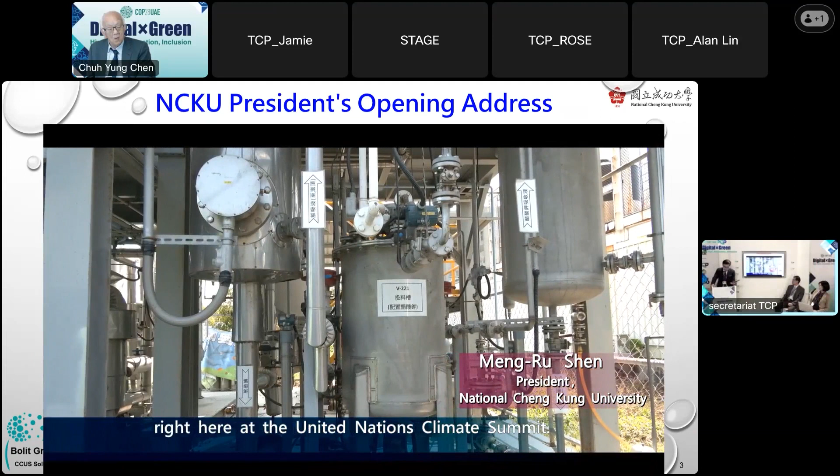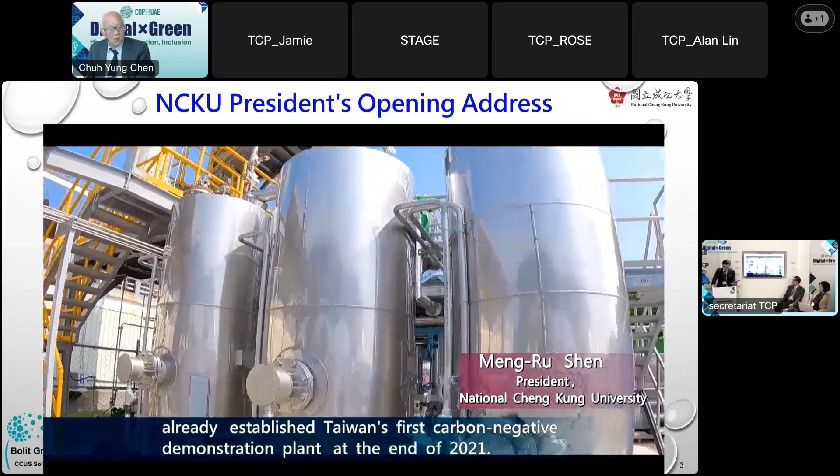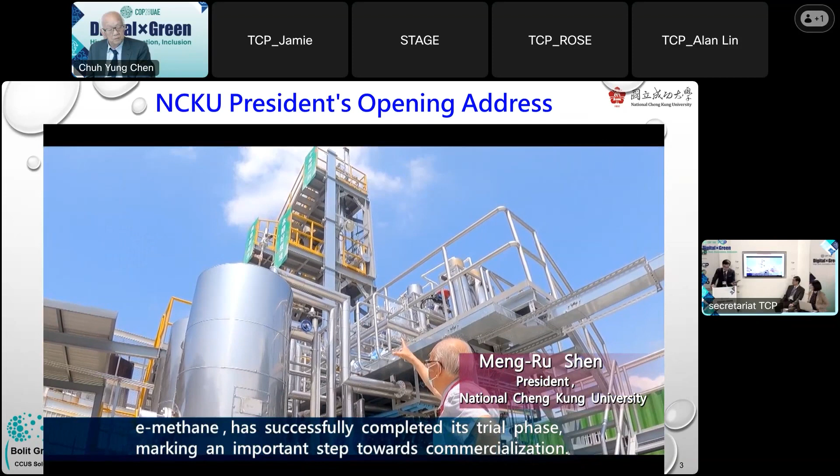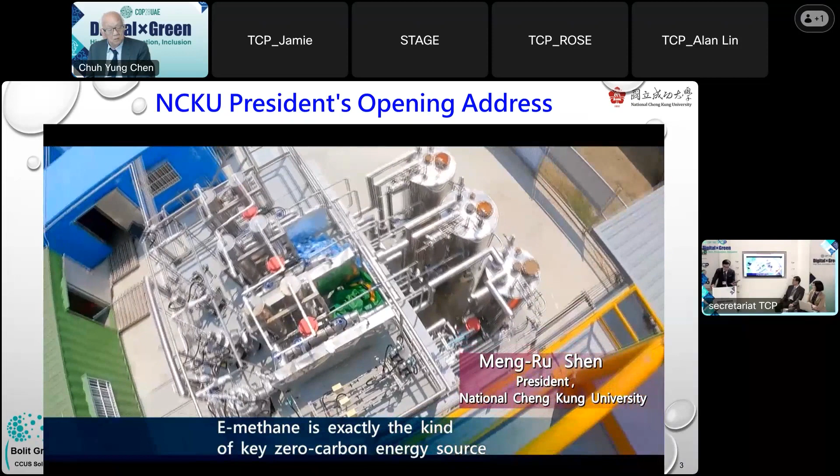A key concern of this COP28 is a global collective effort to achieve carbon reduction, particularly in the transition to zero carbon energy and the replacement of fossil fuel. We are proud to announce that Professor Chen's team already established Taiwan's first carbon negative demonstration plant at the end of 2021. This groundbreaking technology of artificially synthesized green natural gas, e-methane, has successfully completed its trial phase, marking an important step toward commercialization. E-methane is exactly the kind of key zero carbon energy source for the 2050 green energy strategy of Europe, Japan, and other countries. We feel honored to present our scientific work at the stage of the United Nations

and to contribute globally in combating climate change. Finally, I would like to extend my gratitude to all the distinguished participants who honor us with your presence. I hope this forum will not only showcase Taiwan's new achievement in CCUS technology and foster future international collaboration, but also inspire young people to engage in this crucial campaign against climate change. Facing the urgent climate crisis, we need the strength of the younger generation more than ever. Taiwan will go on with you.

Thank you very much. Yeah, thank you, President Shen. And I think he is the first university president from Taiwan in COP28. I think it's very wonderful, and the video is very good.

And besides that, we have two speakers here in the COP28 Blue Zone. The first one is Professor Wang Zhengjie. Professor Wang, say hello to everyone. He is Dean of the Engineering College of the Southern Taiwan University of Science and Technology, and a professor of the Department of Chemical and Material Engineering. And actually, you are a team leader under Dr. Chen, right? Chuh Yung Chen. And besides that, we also have Doris Dennis.

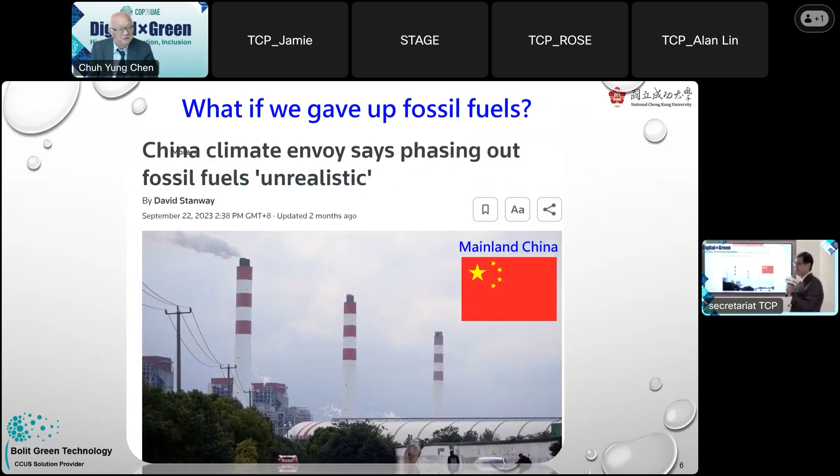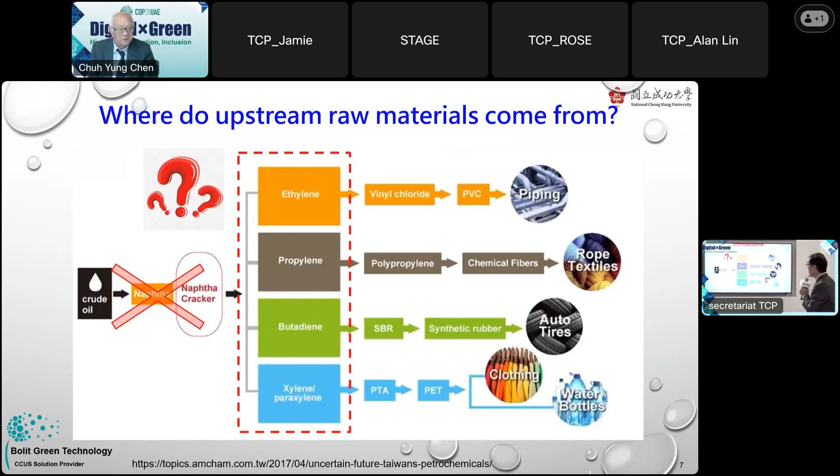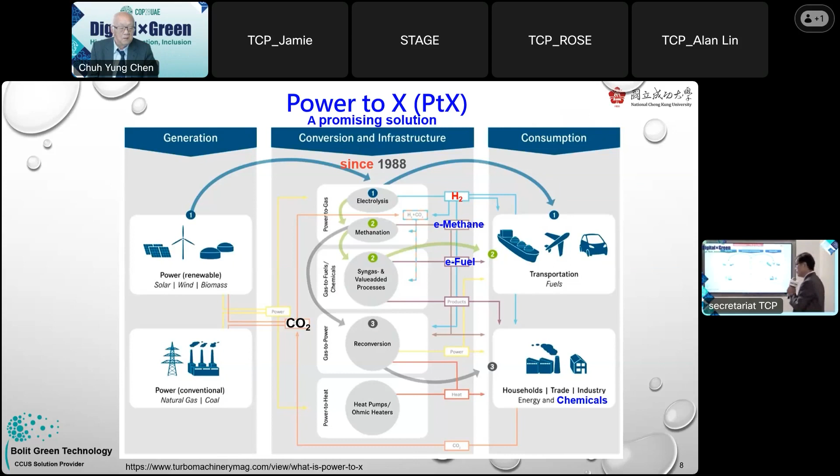So if we do not use crude oil, we must think: where does the upstream raw material come from? Is carbon dioxide possible? Yes, it is possible. It's a promising solution. Since 1988, scientists have developed technology to convert carbon dioxide into e-methane, e-fuel, and green chemistry. We call this technology power-to-gas or power-to-X, where X is everything, including hydrogen, e-methane, or e-fuel.

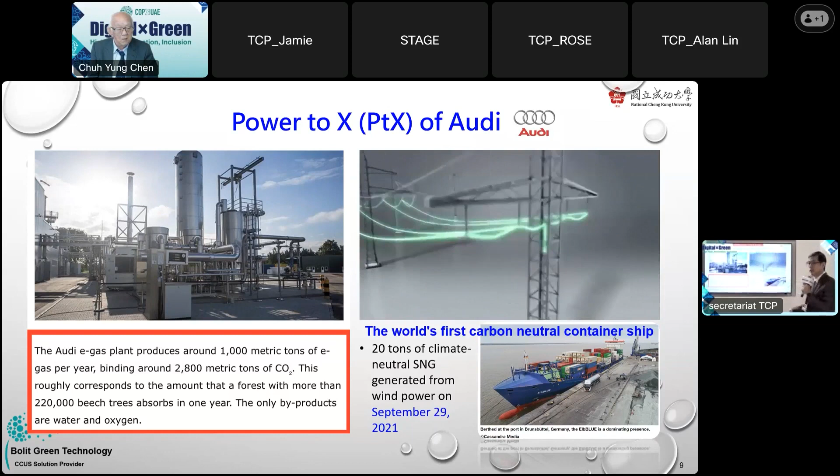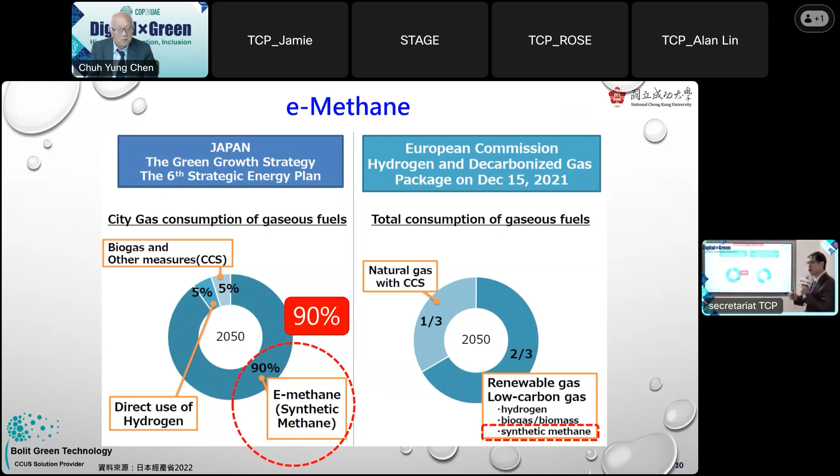For example, the Audi car company has built e-gas production in Germany, capturing around 2,800 metric tons of carbon dioxide. And their e-gas supported the world's first carbon-neutral container ship, which sailed successfully this year. So this is a very popular issue in the world, such as in Asia, Japan. Japanese companies plan for e-methane to make up about 90% of city gas consumption by 2050. The European Commission also plans to manufacture e-methane by 2050. So this is a big future now.

And we must face some challenges for power-to-gas or power-to-X. The first is a high-performance catalyst, because if we can react at a low temperature, energy consumption and cost will decrease. The second is hydrogen from green power. Green power is not enough now, so if you want to use hydrogen, you must search for other sources. Maybe biogas from dry methane reforming is one method. The final problem is we also need excellent engineering to design a high-efficiency process. Maybe some advances should be developed in the future.

Thanks. Yeah, thank you, Professor. Actually, lots of audience members came here because if we want to phase out fossil fuels, you know, our clothes, everything depends on them. We are from Taiwan, and the ICT industry organized together to be a TCP.

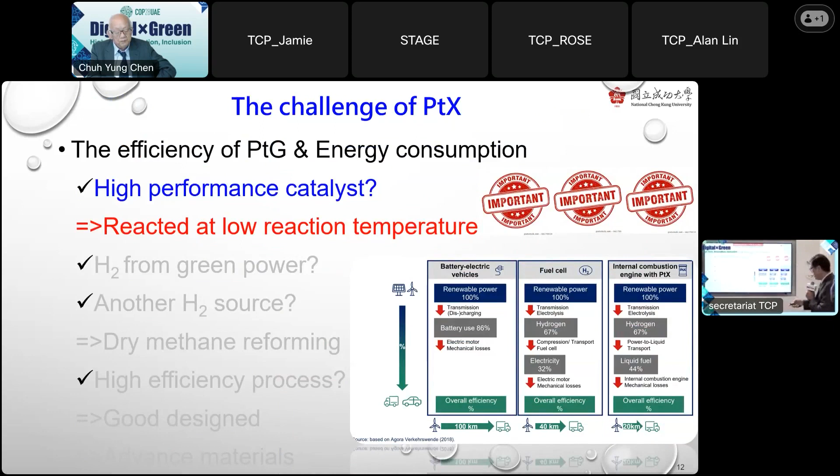You can take a short time to process the chemical. Taking a short time means energy saving, and the cost will be decreased. And now, NCKU research team has developed some cutting-edge catalysts. This is very important in the chemical industry.

It can convert carbon dioxide into e-methane, ethane, and propane. We know C1 to C3 can be applied as e-fuel, just like natural gas. And if we convert it into ethylene and propylene, we know it's a raw material in the chemical industry. So we can use this raw material to manufacture some green chemicals.

This research team also developed a nanotube solvent to capture carbon dioxide from the flue gas. More interesting, this cutting-edge catalyst can convert bio-waste into hydrogen or other chemicals. With this cutting-edge catalyst, we know the bio-waste is digested and we can obtain biogas. The biogas contains methane and carbon dioxide.

If we use our catalyst, it will convert to obtain carbon monoxide and hydrogen. We know these two gases are synthesis gas in the chemical industry. This is very popular now.

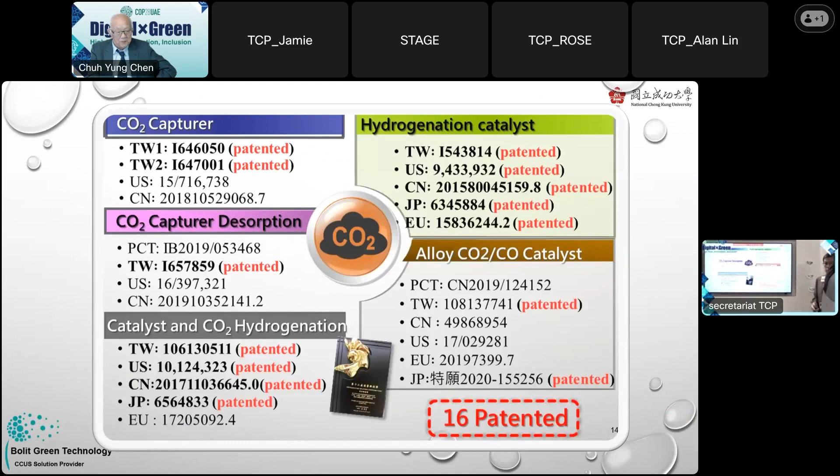I introduced some cutting edge catalysts and processes. We can see it can operate at low temperature and low pressure. In general, methane manufacturing must approach 300 Celsius degrees, but with this catalyst we can operate lower than 180 Celsius degrees. Second, we can convert 100% within a short period of time because of this catalyst. Third, we can produce high value ethane and propylene, maybe over 20%. This is more important because it's like shale gas.

I'm one of the professors, from the previous page. I think the key issue is the temperature, right? Yes, yes, and the other special point is ethane and propylene.

Okay, next the PPT will show you what is important, because we can see the shale gas in the USA has ethane content no more than 20%. If we use our cutting-edge catalyst, we can convert carbon dioxide into high content ethane and propylene, over 20% as I said. More important, shale gas in the USA has many impurities such as sulfur, but if we use carbon dioxide, our product is very pure with no sulfur. This means we will decrease PM2.5 particles, because sulfur is also a source of acid rain.

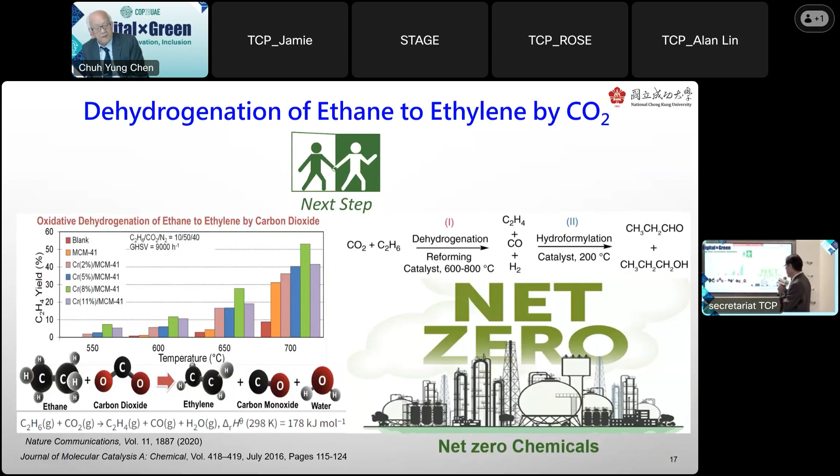Maybe next we can search for some industrial company which has a technique to convert ethane with carbon dioxide into ethylene and propylene. Ethylene and propylene are raw materials of the chemical industry. They can manufacture many chemicals. So if this process moves forward, we can approach net zero chemicals.

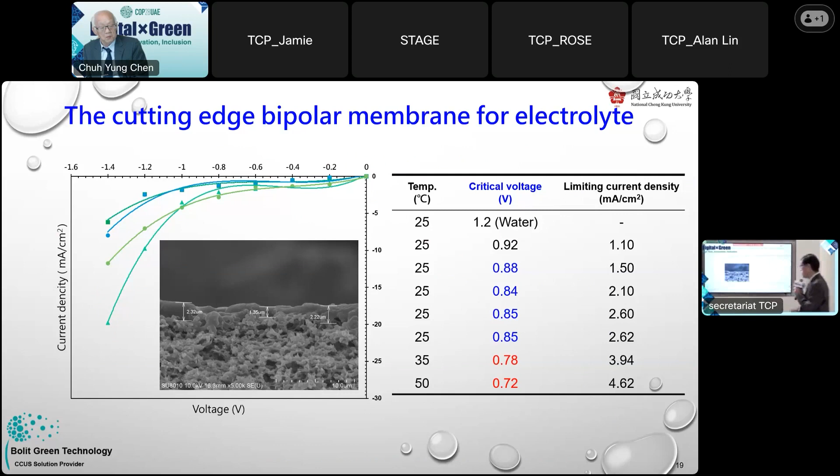However, our research team employs plasma energy to induce radicals on the surface of the membrane. Then polymerization happens at the interface, so we can manufacture a very thin membrane. When we performed water electrolysis, we saw the critical voltage drop to 0.8. When we operate at slightly higher temperature, the critical voltage decreases further to 0.7. So this is a very good bipolar membrane.

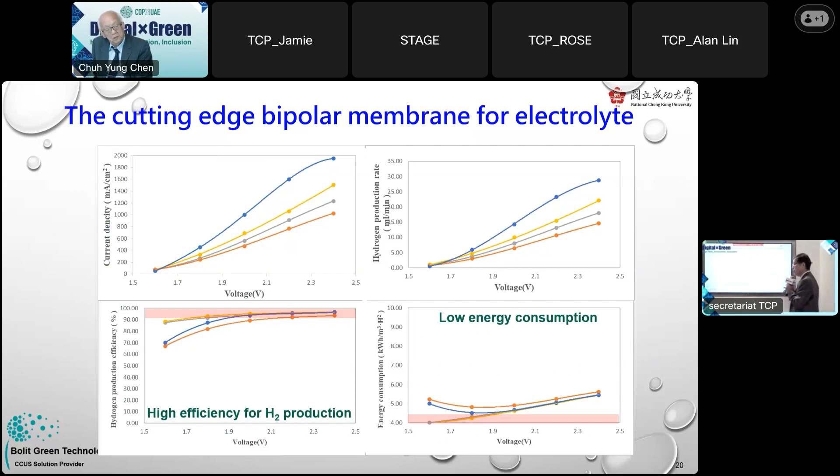Their hydrogen production is highly efficient, and its energy consumption is very low. It's valuable for commercialization. So I think this bipolar membrane is the best choice for water electrolysis from green energy. Thank you.

Yeah, thank you Professor Chen, and a very wonderful talk. I'm not a chemical engineer, but I understand what you say. It's not easy to explain from knowledge so that common people can understand.

Right now I will give the floor to Dr. Chen, because from the science or technical side it's wonderful. But from the business point of view, since they need business support, I'm wondering if there's any kind of business model, or is it just scientific research? Because in the long term the ecosystem needs a business model to survive, and sustainability is very important. Is there any connection with carbon credit in the future, please? Okay, thanks Dr. Peng, and thanks Professor Chen.

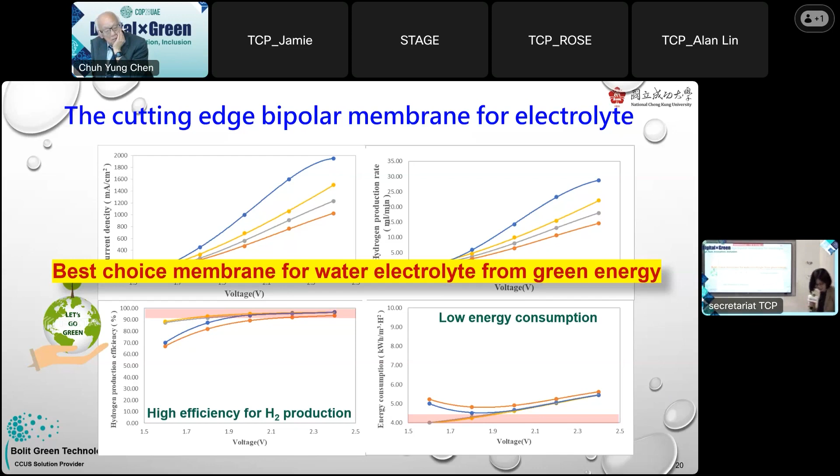So next, okay, the technical part has been covered. So what I'm going to explain or share with you is more the business part. As Professor Wang already mentioned, our technology can produce decarbonized gas energy.

What is important is that we capture the CO2 from the chimney of industry that would normally be released to the atmosphere as a greenhouse gas. What we do is capture the carbon dioxide from the chimney, then use it as a raw material to produce synthetic natural gas, which is methane. This means all the emissions can be captured and then used as material to make natural gas, to replace raw material again in industry or for households in the future.

So our business model is to decarbonize gas energy. Let me give you a quick picture here. We capture carbon from flue gas, which is hard to abate, from different sectors, for example steel mill, aluminum, and fertilizer.

We capture all the CO2, then combine it with hydrogen generated from green sources, from renewable energy or turquoise hydrogen from biogas. We have different patents for biogas absorption and for the reactions between CO2 and hydrogen. So we capture the CO2 and combine it with green hydrogen to produce e-methane, e-ethane, or e-propane, which are very important.

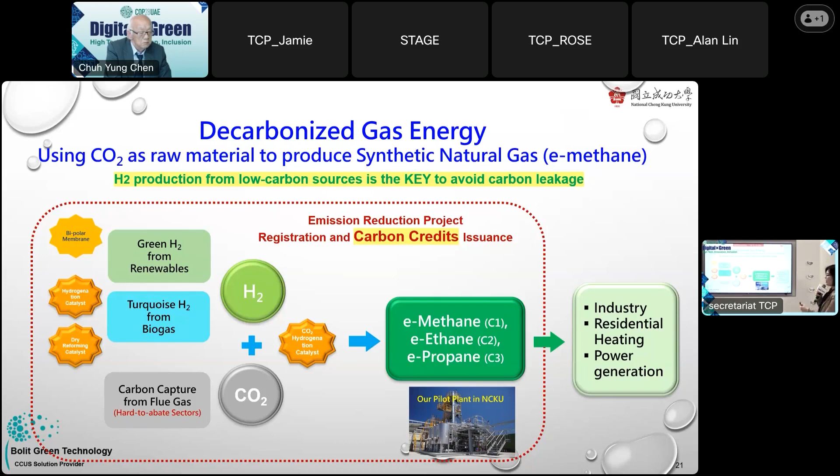So comparing this, if we want to ship hydrogen everywhere, our recommendation is to ship CO2 to where green hydrogen can be produced, which is much easier and more economic. So at this stage, the CO2 is captured, and to optimize the CCUS value chain on a global basis, we ship CO2 to where green hydrogen can be produced, to realize the reaction between CO2 and hydrogen to produce methane.

So step one, we capture the CO2 and liquefy it. Then we transport the CO2 to where the green hydrogen is. This capture of CO2 from industrial flue gases and shipping for CCUS or CCS is really an additional solution contributing to greenhouse gas reductions. Of course, we would like all the shipping carriers to produce less greenhouse gas as well.

So what's happening is there's a new trend, a rapid growth, where many gas companies in the world, because they want to first phase out fossil fuels - meaning natural gas dug from the ground will be phased out soon or in the future - so these gas companies, not having natural gas from the ground, try to get it from industry instead. It's really like a circular economy in the future.

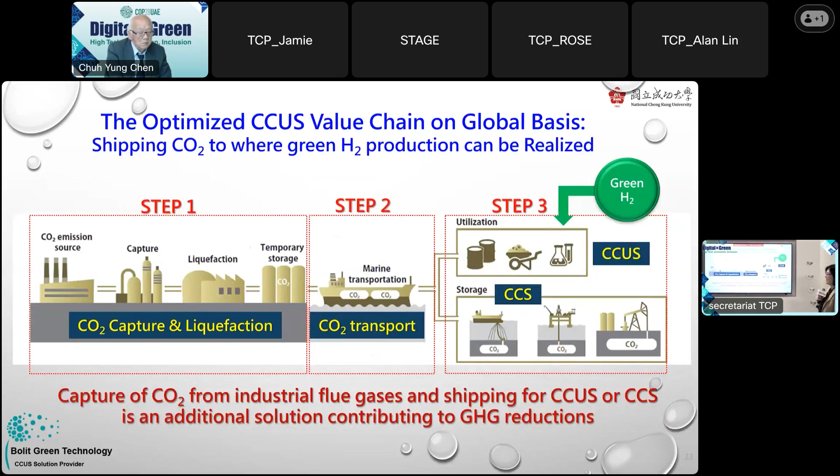You know why the Hydrogen Shot cost can be reduced? Because there are more and more renewable energies. The price of renewable energy is coming down. That's why we can produce green hydrogen from less expensive sources. That's very important. I think it looks like there's some business model right now, right? We do have some business model, but we're showing the end. Yeah.

Wonderful. So I will go back to some technical issues, because you mentioned we will talk about biogas reutilization and also green syngas. What is syngas? Because your model is CO2 resource reutilization into e-methane, right? Methane and e-propane. This kind of thing we can call a circular economy, with the potential to create new industrial chains and economic models. So it changed our thinking about CO2.

I noticed that Japan, at the Osaka World Expo, will use new technology as a showcase, turning kitchen waste into synthetic natural gas, e-methane, and another future trend of waste resource reutilization. So Ding Wang, can you talk about more applications of biogas and any technology breakthroughs needed? Okay, thank you, Professor Peng.

For biogas, we just mentioned hydrogen may have two sources. One is obtained from water with electricity from green power. The other resource may come from bio waste. Because when the bio waste is digested, we can obtain synthetic gas. As I said before, synthetic gas is very popular in the chemical industry. This is a very well-known technology.

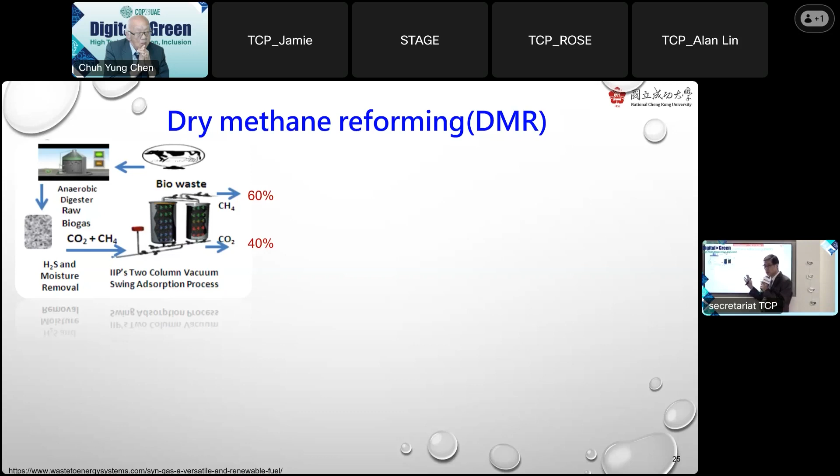If we consider the biogas composition, we will find the methane is approaching 60% and the carbon dioxide is 40%. So if we obtain this biogas, we can use our cutting-edge catalyst to transfer them into synthetic gas. And I must mention the carbon dioxide in biogas is not enough, so you must add some carbon dioxide from the capture system, so more carbon dioxide will be used in this system.

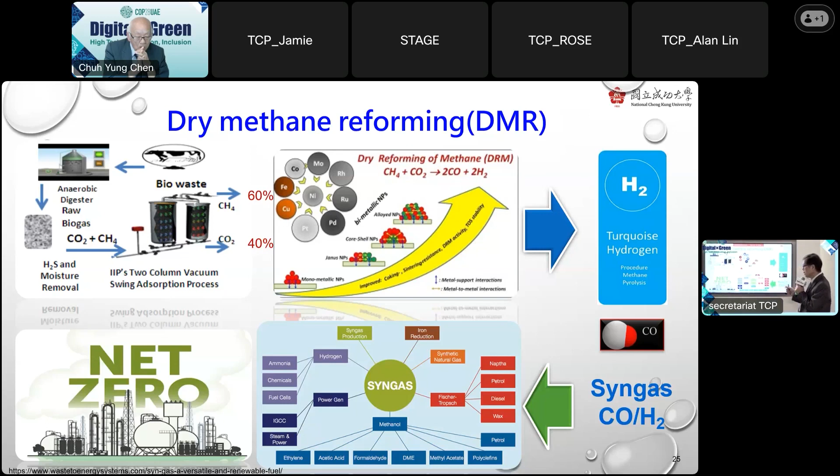And for the synthetic gas, I show you this PPT below. You will see that with synthetic gas you can manufacture methanol, formaldehyde, or polyolefin, such chemical products. So this is a very valuable process, so we can approach net zero chemicals.

But if we use DRM technology, dry methane reforming of biogas, we must face some challenges. One is methane activation. Challenge two is thermodynamics and kinetics. The third challenge is catalyst development. The more important challenge is coking, because if coking happens, your catalyst will lose its function, so the process will be useless. However, when we use our cutting-edge catalyst, coking will not happen.

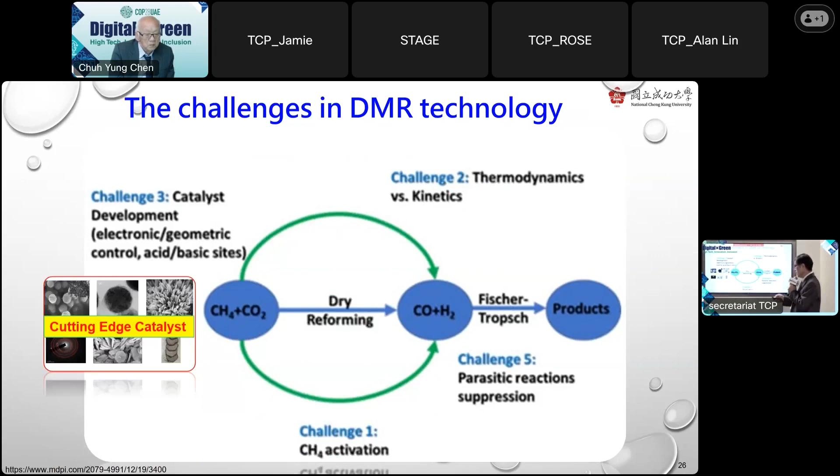More important, when we take this catalyst after 100 hours of operation, we can see in this picture there is no coke formed. This is important. Many catalysts form coke in a short time. So I think maybe this is a high potential catalyst for the net zero DRM process in the future. Thank you.

Okay, thank you, Ding Wang, you made a wonderful introduction about the reutilization into e-methane. I didn't know CO2 had so many functions. Actually, it's a very good idea. So I have a question about CCS, because CCS, as we mentioned, is a carbon capture technology. And another issue is fundraising.

So I will talk about this topic because Taiwan will need about 40 million tons of CCUS by 2050. Actually, it's a government proposal. However, CCUS means capturing CO2. Ding Wang, can you introduce the CCS of your demonstration plant, the NCKU plant? And is there any kind of technological breakthrough in this one?

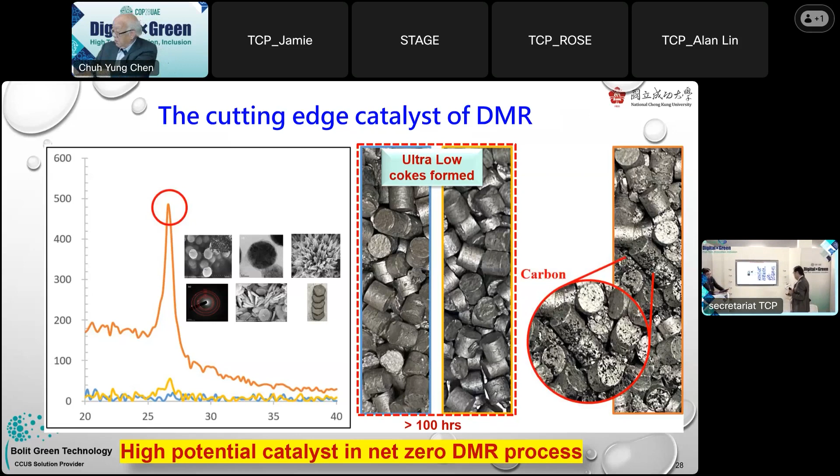And I will ask Dr. Chen. Actually, you mentioned you have some business model there. However, as I know, besides the business model, you should have some fundraising. For example, Japan has the JCM credit model. They encourage enterprises to join. So do you have any idea about the fundraising and the ecosystem, how to make it, please? Yeah, Ding Wang first. Okay, you first. Okay, thank you, Professor Peng.

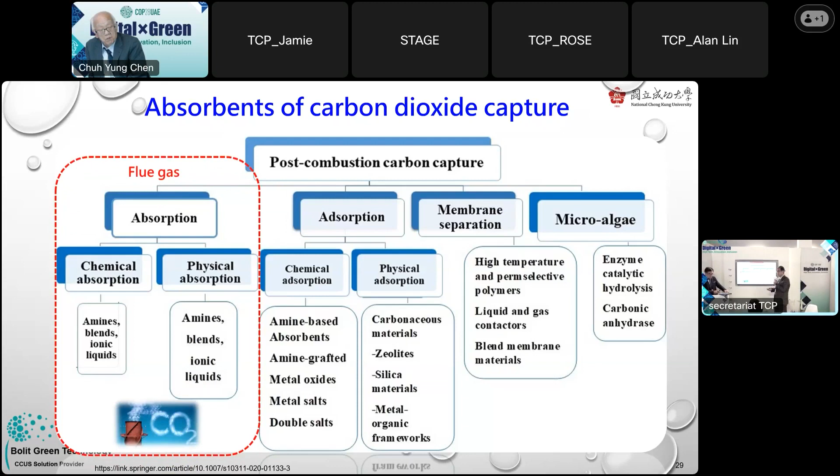The NCKU research team developed a very interesting absorbent for carbon dioxide capture. If we want to take this process, capturing carbon dioxide is the first step. It's very important to reduce carbon dioxide emission. We know many methods can capture carbon dioxide. However, to capture flue gas, absorption may be more suitable because the amount of flue gas is very large. Typically, monoethanolamine is an alkaline liquid. It can react with the acid gas carbon dioxide.

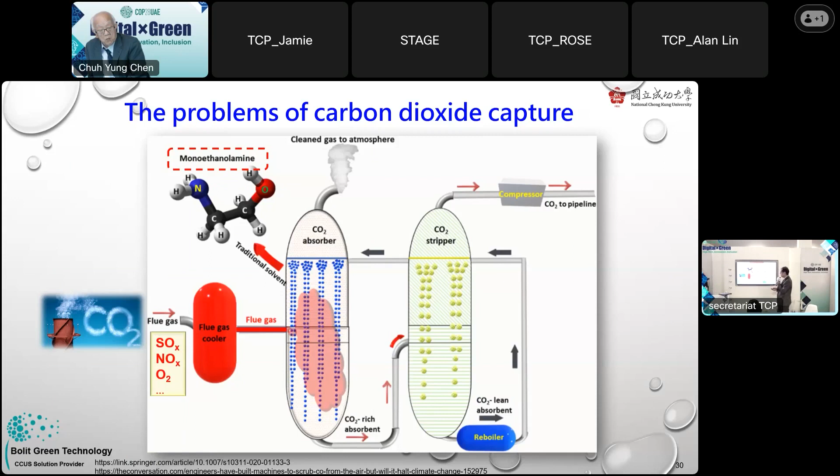However, we know flue gas contains many impurities such as SOx, NOx, or oxygen. When we use monoethanolamine, we will face 3 problems. The first problem is if the flue gas contains SOx at lower than 200 ppm concentration or some oxygen, there will be degradation of the amine absorbent, maybe up to 30%. This means you must refresh the absorbent, and your cost will be increased.

And more important, side reactions exist in this capture system, such as amine reacting to form nitrosamine. This is a carcinogen with ecotoxicity. This is secondary pollution, and we do not want this secondary pollution. The third problem is corrosion. It will corrode instruments or steel. This means you must pay to maintain this process.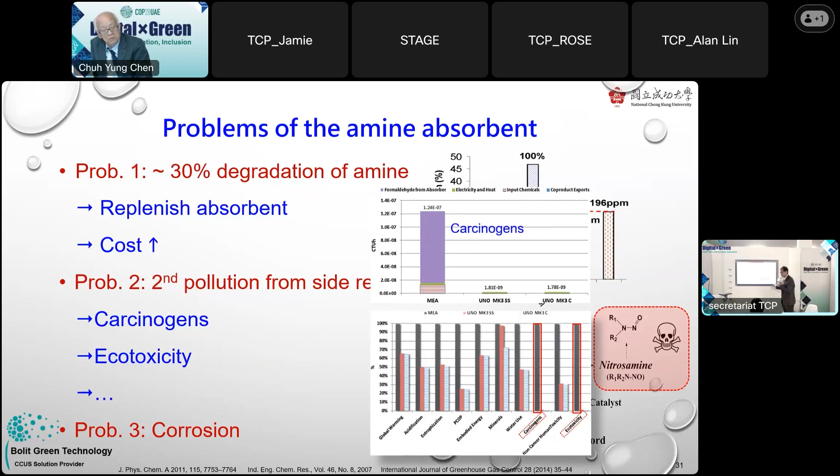Our research team developed a novel absorbent for carbon dioxide. It's a high-concentration potassium acetate liquid. So far, I know no research team in the world uses this absorbent. If you absorb carbon dioxide, the original transparent liquid turns turbid, and finally we obtain a slurry state product. We characterized its composition and found it contains an alkaline solid, potassium hydrogen carbonate. The other is a dimer, an ester solid. Both compounds are solid, like an effervescent tablet.

When we add water or heat it, we find this tablet dissolves, so carbon dioxide will be released. Then we recover this absorbent and can recycle it. More important, this is a salt liquid, so no side reaction exists.

Let me show you a very interesting video. This is the carbon dioxide released from, sorry, it can work. This is a video. Okay, now it's going. We can see if we inject a tiny amount of water, the carbon dioxide will be released very quickly. It's at room temperature. It means you need no extra energy to push the carbon dioxide release, and the release rate is very fast.

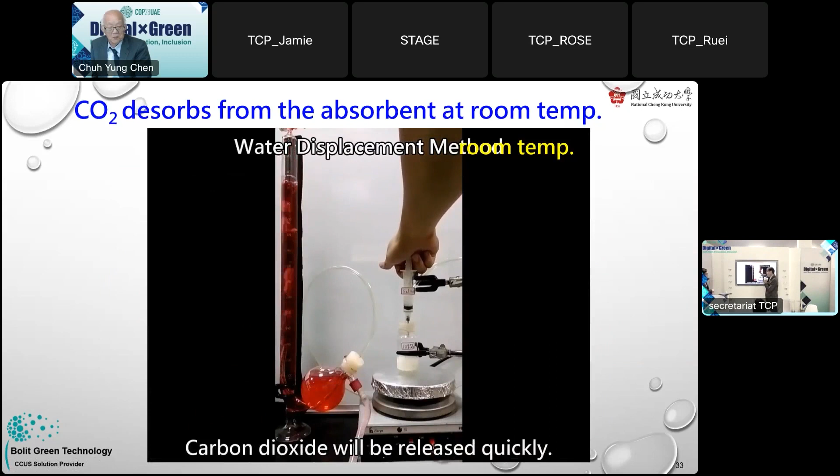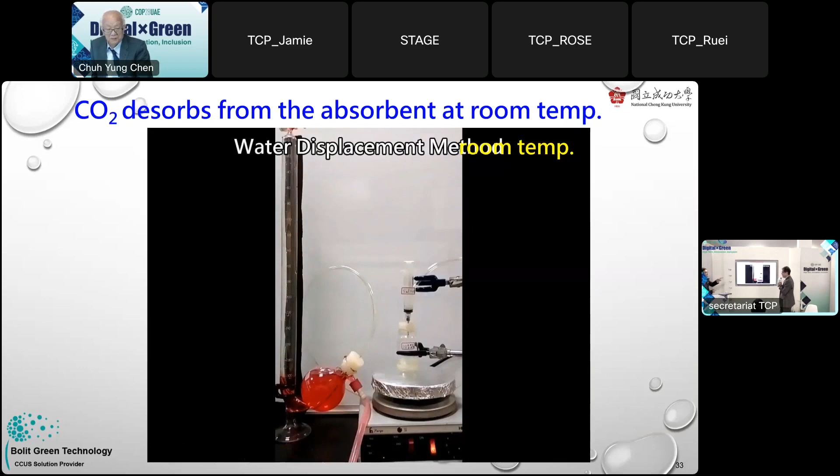Professor, can you explain the video in more detail? Why is the carbon the red color or something? Wait a moment. Okay. We can see this is the slurry state of absorbent after carbon dioxide capture. So we inject water, just water. Yes, the carbon dioxide will be released very quickly. So we can recover this absorbent, and we don't use much energy. So this is very interesting academically. So this is your breakthrough point. Maybe. I think it may come true.

Next, if we release carbon dioxide by heating, the heating temperature is no more than 100 Celsius degrees. Because if we go over 100 Celsius degrees, water may change to steam, with very large energy consumption. So at no more than 100 degrees, we can release the carbon dioxide. So it is a very energy saving process. So maybe we can use this process to control our power plant.

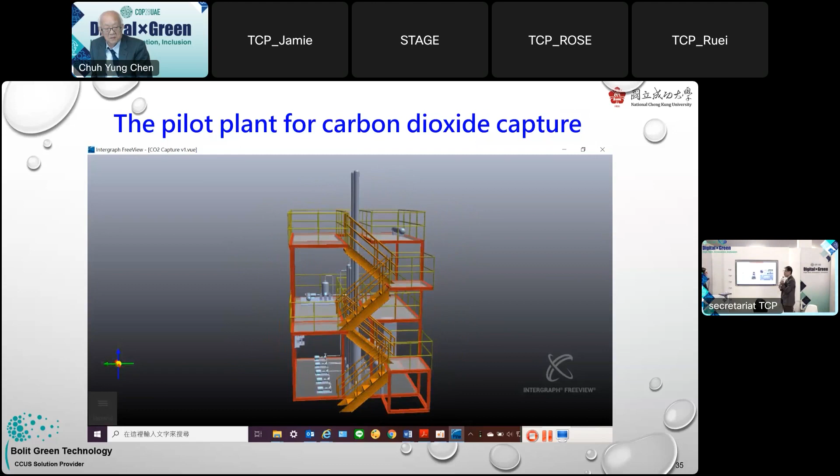If we use our new dispersion tool, the bubbles will be very small. This means the interface between gas and liquid is very large. So the capture efficiency will approach 90-97%. It's high efficiency. This novel absorbent is developed by our team, so this is a new one. I think maybe we can cooperate with some company to construct a bigger carbon capture system.

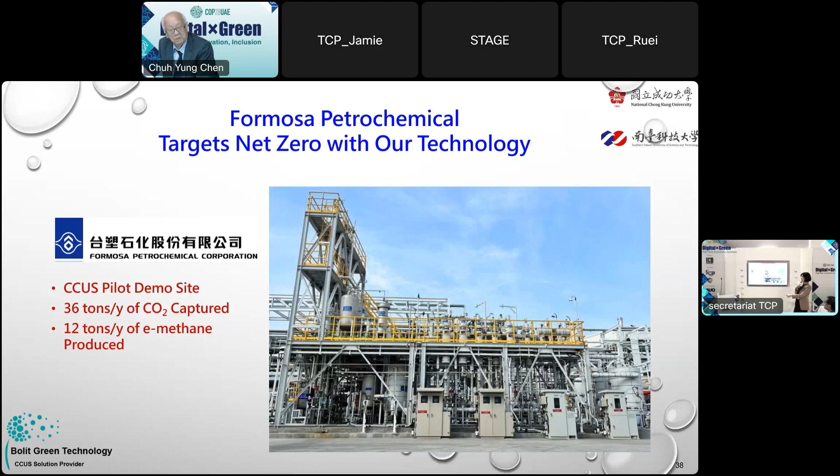Second thing is that we would like to thank the enterprises contributing to our research and the pilot programs. Actually, you can see from these research and pilot programs where they're from.

They are large emitters. And these are the large emitters that produce emitted CO2 from their flue gases and chimneys that can be used in the future. So thanks to them for contributing to our research.

I would like to add one more thing. I forgot to say that earlier. When the CO2 is captured, it is very important. If the large emitters, the power generation companies like Taiwan Power, capture all the CO2 from their chimney flue gases, it will reduce the emission factor of the power grid a lot. And I think it's an enormous additional financial value for the whole industry

using electricity. As we know, in Taiwan and many other countries, if a company is doing a greenhouse gas inventory, there are two types of greenhouse gas emissions that can be accounted. The first one is called Scope 1. Scope 1 means the greenhouse gas emissions emitted directly within your site from combustion sources, from the fugitive sources, and also from the production process.

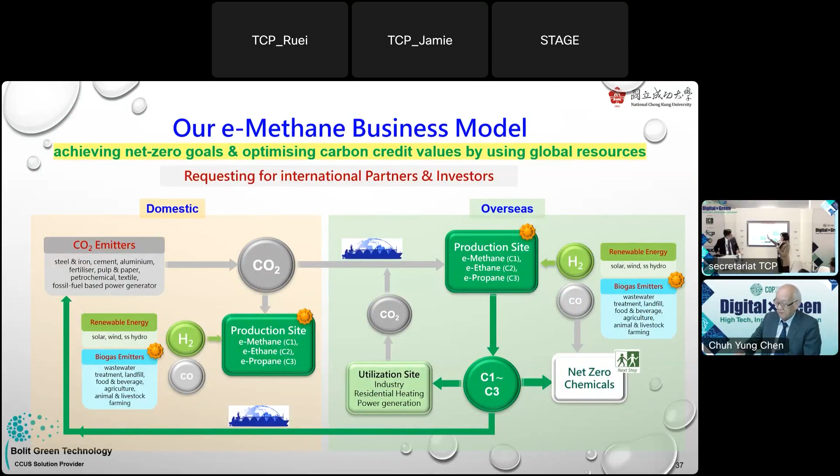Thank you. The floor goes back to Professor Chen, and this is the pilot plant at National Cheng Kung University, built by Dr. Chen's team — such a huge team. Many people have contributed to this, so we'd like to thank them all at once. Professor Chen, the floor is yours.

Before Professor Chen speaks, I will ask you questions. How many times have you attended COP? I'm wondering, by using NCKU's product, why is it important for you to be at COP 28? I've actually been participating in COP since 1997.

When the Kyoto Protocol was signed at that time, I was working at DNV as a certification company, more like a carbon credit certification auditor. Then I participated in COP with another hat on, from a trading company for carbon credit. Now, I would say this is the most exciting COP I'm joining, because what I feel is very important is that I'm helping the industry, not only for the projects, but for the whole industry that can utilize this, and it's really economical.

Okay, I will send the questions to Ding Wang. It's your first COP, right? Yes. What's the importance of COP for chemical engineering?